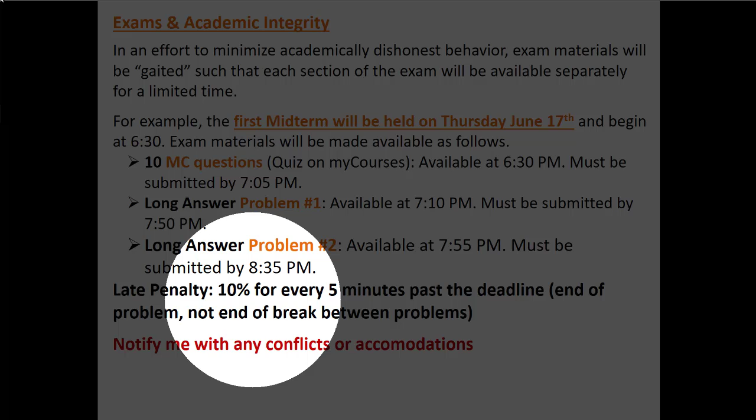Right? Now, if it's longer than 5 minutes late, then there'll be a 20% penalty, right? If it's longer than 10 minutes late, then, so it sort of goes up by 10. Do you need to print out the long answer? If we can't, what do we do? Yeah, so you'd hand it in like the homework, right? So you don't need to, you can just write on lined paper whatever your solution is, right? And then sort of scan it, like with CamScanner or however you do your homework, and then submit it.

Right, so there's this kind of escalating penalty, 10% for every 5 minutes that it's late. I think that if you look at the announcement that's posted on myCourses, it gives kind of an example of how that escalation works, just for clarity, but it didn't fit on this slide. So there's more details available in the announcement in the email that I sent you from the myCourses page.

The other thing that I would like to do, since we didn't formalize the time before this, if you have any conflicts with this time, or you have university approved accommodations that you would like to use for this exam and subsequent exams in this course, please let me know and we'll make sure that that gets applied. It does mean, not that you have to worry about this, but then you'd have sort of a different Dropbox to use, and a different quiz to go into, because things will open and close at different times. Does anyone have questions about the format of the exam?

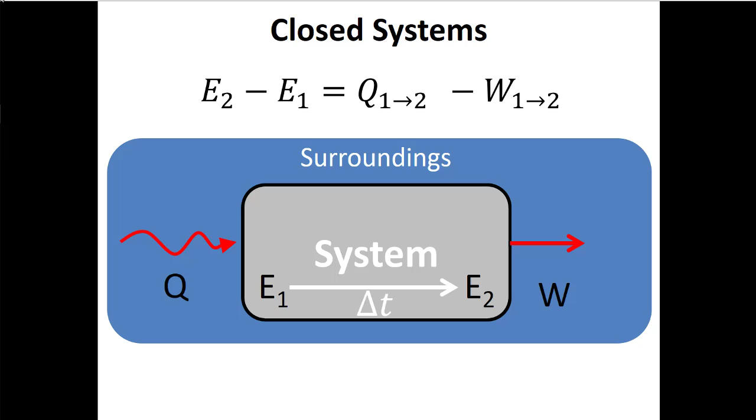Okay, so we've been talking about closed systems, right? So what we're going to talk about today, we're going to start to venture into the realm of open systems. Now, I always hesitate to say this because I'm not saying don't pay attention, but this material will not be on the first midterm, right? But we're going to move away from closed systems and into open systems today. But before we do that, I just want to go over a bit of a refresher, give you a bit of a flow chart, a reminder of how to do these closed system problems, right?

So we know that the first question that we want to ask when we're doing these first law problems is: is the system open or closed? And up until this point, and on the first exam, the answer to that question has always been, or will always be, that the system is closed. And because the system is closed, that means we use the closed version of the first law, right? That delta E is equal to Q minus W. If we make some assumptions, we can often turn that equation into delta U is equal to Q minus W.

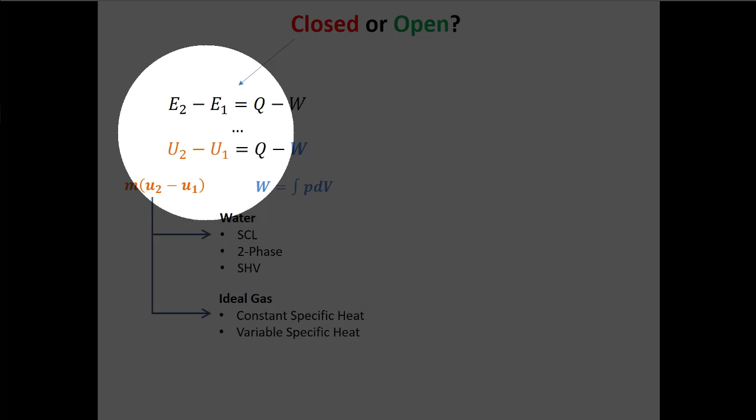And then we find the work done in a particular process by understanding what the pressure-volume relationship is. And if we can cast pressure as a function of volume, then we know work is the integral of P dV. And then on the other side of the equation, for delta U, we remember that that's mass times the change in the specific internal energy, right? So this is the end point of the process minus the initial point of the process. But then we've got to ask ourselves, what's the fluid? Right? And we have two different possible answers for that.

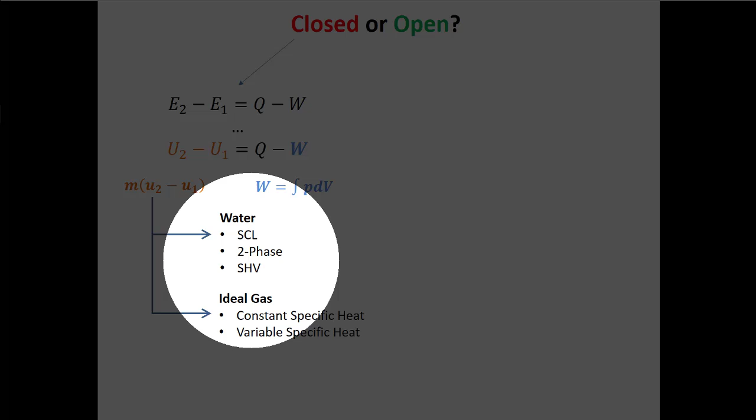The first, which we probably have more experience with, is that the system is water, or at least something that's going to go back and forth across the vapor dome. In the future, we'll deal with things like refrigerants that do this too. But for the first midterm, we can sort of say, okay, it's going to be water or air. But really what that means is something that's going to boil and condense, and an ideal gas, right? But if it's water or something like it, then we can either have liquid water, some two-phase mixture, a mixture of liquid and vapor that are both at the right conditions for phase change, but there's some mixture. It's not a complete liquid or a complete vapor. Or we can have superheated vapor.

So that's all steam that's past whatever boiling temperature exists for the pressure that we're at. So this is where we draw those PV and TV diagrams and we try to figure out where on that graph we are, right? What's the right part?

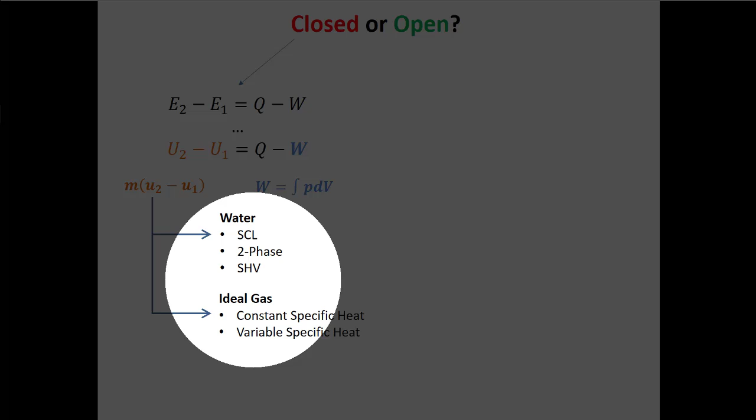But our other option here, instead of water, we can have ideal gases. Now, if it's an ideal gas, that's still not enough. The good thing is if we answer, oh, it's an ideal gas, that means we can use the ideal gas law, just like we did in the problem last class. But we still have to decide if we're going to model the change in the specific internal energy as constant or variable specific heat.

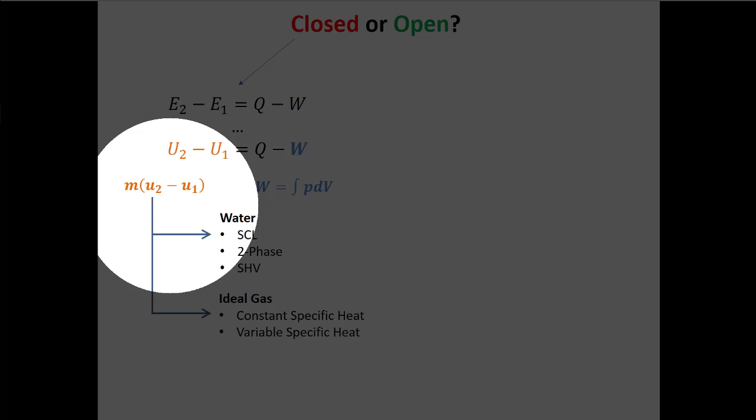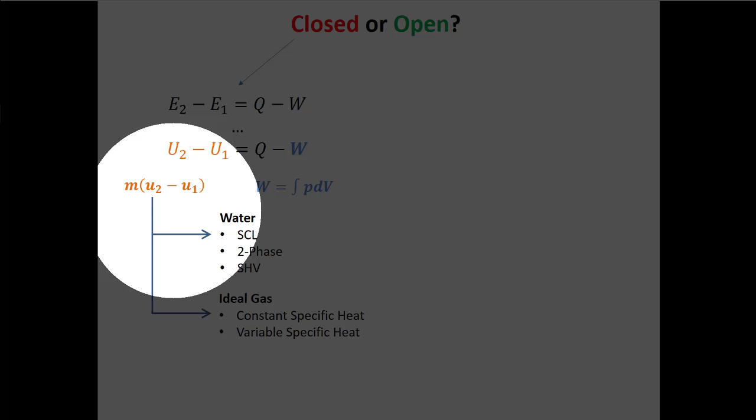If it's constant specific heat, we'll never find the individual specific internal energies. Instead, what we'll do is we'll pretend or model that delta U term as CV, the specific heat at constant volume, times the change in temperature. If it's variable specific heat and we're dealing with air, then we'd go to something like table A22 and we'd use a temperature and we'd interpolate to find a specific internal energy.

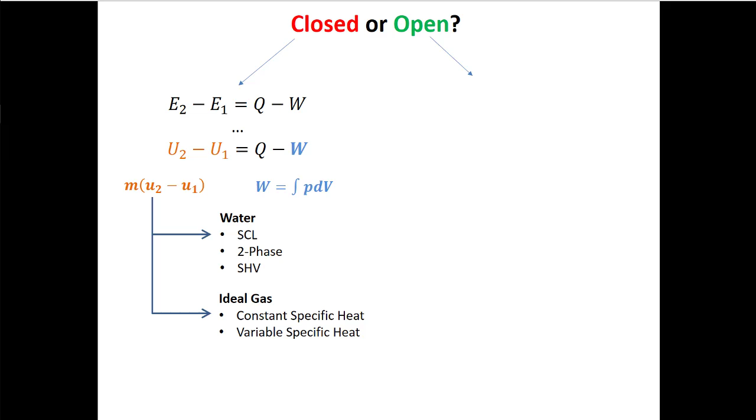So what we're going to start to talk about today is what happens when the answer to this first question isn't that the system is closed. What if we're dealing with a system where mass can freely enter and leave our system? So here we're going to have three more questions that we're going to ask. But the first one is going to be what happens to the mass. Eventually, we're going to ask what happens to the energy. Eventually, we're still going to deal with a different version of the first law.

But what we've really learned in this first module of the course is that mass itself has a means of storing energy. So if mass is coming in and out of our system, that means that energy must be coming in and out of our system with it. Because remember, thermodynamics is all about these energy transactions that are happening in the universe. So the first step towards understanding what happens to the energy is going to be what happens to the mass. Now, we didn't really talk about this for closed systems because in closed systems, what happens to the mass is nothing. It all just stays in the system.

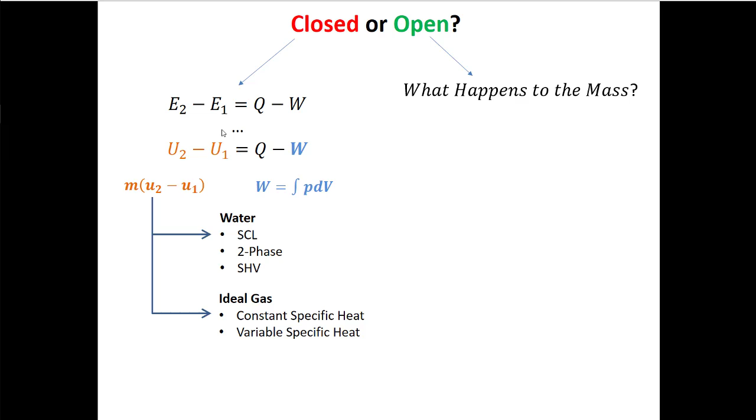So when we talk about open systems, or sometimes I'll use the word control volume, this is a system where we draw this imaginary boundary, which is called a control surface, that envelops whatever our system is. So this is a sketch of an internal combustion engine, and it's an open system because there's air intake that's coming into the system. There's exhaust of air. It's not the exact same air. There's some chemical process that's going on in here. And there's also a fuel line that comes and feeds the engine. There's air coming in, there's fuel coming in, and there's some kind of spent air fuel mixture that's going out of the exhaust. So this is an open system.

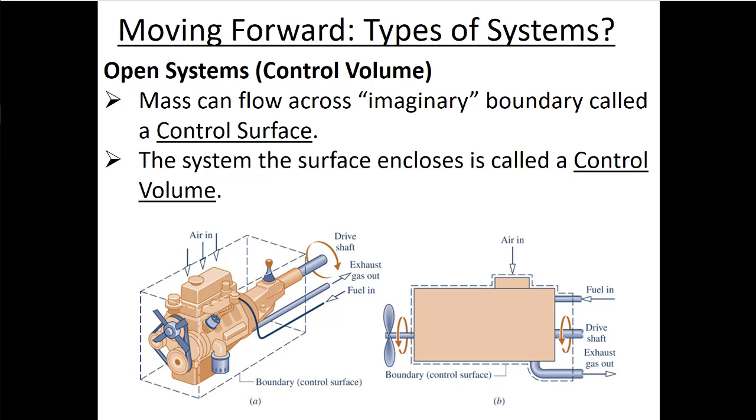So when we're dealing with open systems, there's a couple of things we have to do. So the first thing, this happens in closed systems too, we have to understand what are the boundaries of our control volume. So what's the boundaries of our system? What part of the universe are we interested in? Then we'll answer the question, what happens to the mass? And then once we know what happens to the mass, we can ask the question, what happens to the energy? So the main focus of what we're going to talk about today is what happens to the mass. But before we get there, I want to talk a little bit about how do we draw control volumes.

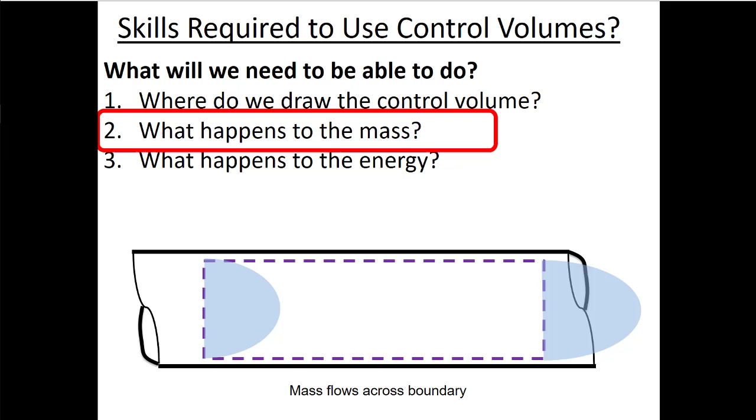So this is supposed to be a sketch of a pipe. And really what we're doing here when we draw this control volume, I try to draw the boundary up against some solid part, so up against the inside of the pipe wall here. And then the porous parts, the part where mass can flow through, I try to draw that so it's perpendicular to the flow. So the flow comes right across. We're not going to do any kind of vector calculations here, but when you start to deal in fluid mechanics and you try to find maybe forces that are acting on these boundaries of your control volume, it's a good habit to get into if you're drawing these lines perpendicular to the flow.

So what happens to the mass? In this class, there's a few core equations that we're interested in. We already talked about the first law of thermodynamics, this idea of conservation of energy. Another bedrock idea in thermodynamics is that mass is conserved. So the change in the amount of mass stored in a system over some time interval, we can figure that out if we just count all the mass that came in and all the mass that went out.

So again, there's this verbal definition, but I think the math here is more straightforward. Basically the mass at the end minus the mass at the beginning is equal to all the mass that came in and all the mass that came out. I got my teacup over here. If I take the lid off, it's empty right now. There's no mass in here. But if I put this out in the rain, like it was pouring rain yesterday here, there'd be some mass coming in, which would mean that my mass at the end would be more than my mass at the beginning.

Now, this is pretty straightforward. I could tell this to my 3-year-old and she would kind of get it. But the problems do get a little bit more complicated, so we have this mathematics to take care of it. The change in the mass stored in the system, that's what's on the left-hand side of the equation, is equal to... This is like the bouncer at the bar counting how many people come in and how many people go out, because there's some regulation about how many people can be in the bar. So we're gonna count all the mass that comes into the system, and then all the mass that goes out. And the difference must be stored in the cup.

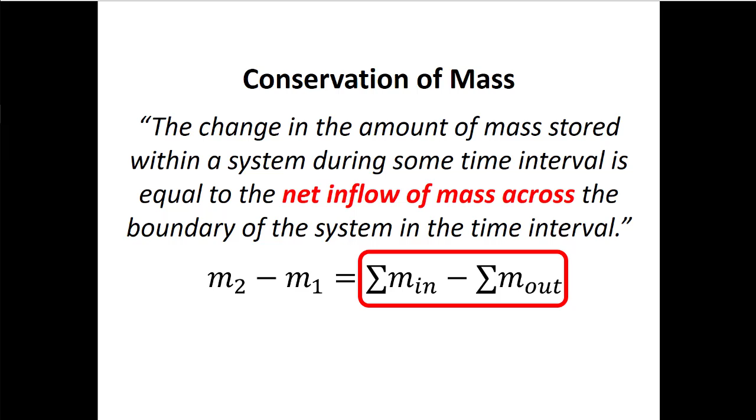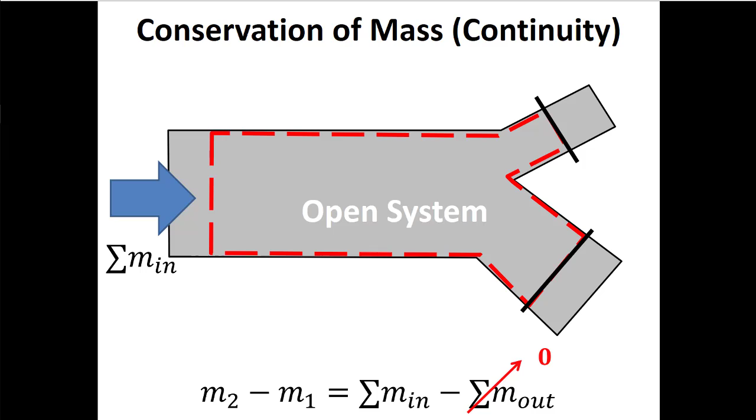And then I could take this system, let's say this was a pipe system, and it's filled with nothing. It's not filled with nothing, it's filled with air. So I block the 2 ends, so no mass can get out. If no mass can get out, and I want to find out how much mass exists at the end, I can just add up all the mass that came in. That means this would be positive on the right-hand side. That must mean that the mass at the end of the process is more than the mass at the beginning of the process. Hopefully that's pretty straightforward. Now this would be the equivalent of, I guess, your toilet when you flush it.

The first thing that happens before the valve opens back up is that there's no inlet fluid into the reservoir of the toilet, but the water rushes out of the reservoir, right? So in that case, there's no mass in, that's 0, but there is mass out, and that must mean that this right-hand side is a negative number. So that must mean the left-hand side is a negative number, and the mass stored in the system at the end of the process is smaller than the mass stored in the system at the beginning of the process, right?

So we can find the mass at the end of the process if we know the inflows and the outflows, right? So this is conservation of mass. Sometimes, because we do this to ourselves, there's shorthand and you got to bust out your engineering decoder ring, right? So sometimes instead of saying the words conservation of mass, someone will say continuity, the continuity equation. When they say that, they're talking about conservation of mass, right?

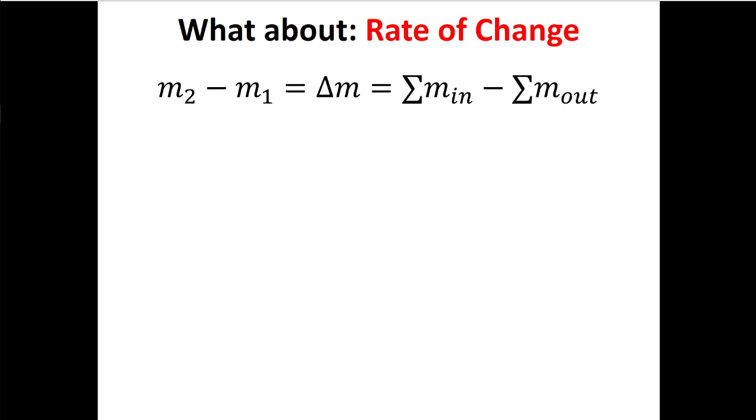Now, there could be alarm bells going off in your head. That means there's some calculus coming. And that's more or less true, but just to formulate the equations. We tend not to do too much calculus in this class, although that'll come in heat transfer and fluid mechanics. But how do we construct a rate equation from this elapsed time equation? Maybe you remember this from math class.

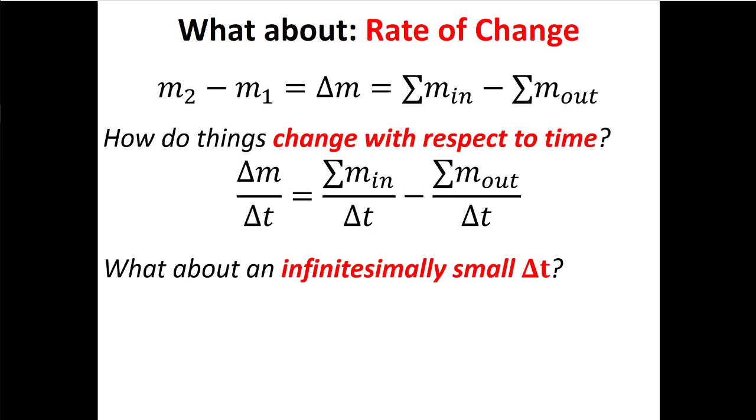We're going to take all of these terms and divide them by some change in time. So there's going to be the change in the mass stored in the system divided by some time interval, the amount of mass coming into the system divided by a time interval, and the amount of mass going out of the system divided by a time interval. And to construct a rate equation, we say, what if that delta t, that time interval, is super, super short? It's an infinitesimally small change in time. Then these terms become rate terms.

Now, we're going to use a specific kind of notation because there's basically two different kinds of rate terms that we can talk about. The first ones we're going to write down like you'd see in calculus, as d something by d something else. In this case, the mass stored in the system by time. So dm/dt is going to be on the left-hand side of the equation. When it's d something by dt, it represents something that's stored or depleted in our system. We can write that for the energy in our system, or for the mass in our system.

But then we have these other terms. These terms are not about what's going on inside the system. These terms are about what's going on at the boundary of the system. They're not talking about what's being stored or depleted in the system. Instead, they're talking about the rate: how fast is mass coming in at the inlet, and how fast is mass going out at the outlet?

So even though all these terms have the same units, kilograms per second, for example, some unit of mass divided by some unit of time, they mean different things. So we denote them differently. Things that are happening at the boundary are typically given a dot. This is another way in calculus that you sometimes represent d something by dt. But when we put a dot over something, what we mean is it's something that's not stored in our system.

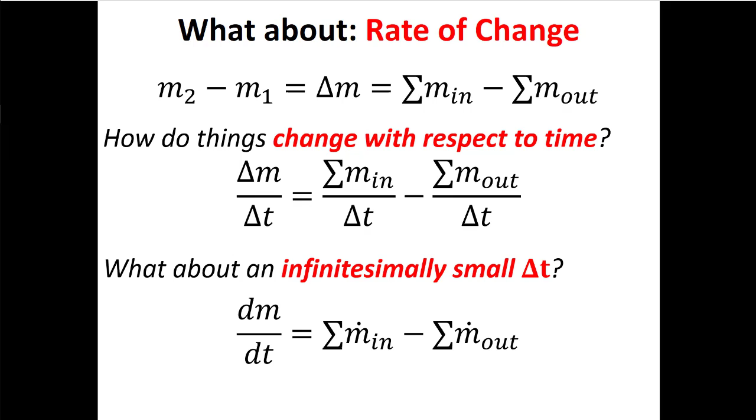Or something that's happening at the boundary, right? So we got dm by dt is equal to the mass flow rate in minus the mass flow rate out. And the reason that we do this, well, I guess we'll see. I don't want to get ahead of myself here. So here, if we write out the words for this expression, this is no longer the change in the mass. This is how fast is the rate of mass changing.

So if I was leaving my cup out in the rain and I knew how fast the mass was changing and I knew the density of the water, I could tell you something about, this isn't about what's the water level at one time and what's the water level at another time. This is about how fast is that water level moving up, or how fast is that water level moving down. This is how fast am I storing the mass, or how fast am I depleting the mass?

If you thought about this in terms of like your cell phone, did you use the normal charger or did you use the fast charger that maybe came with your phone? So how fast is the system charging? How fast are we storing or depleting mass in our system? I don't know if that analogy worked.

So then this next term, this is going to be the sum of all the mass flow rates into the system. So, in that branching path that I showed before, which I'll show you again, there's only one inlet. So I only have to worry about one mass flow rate in. But there were two mass flow rates out, so we got to add them together to get the total mass flow rate out.

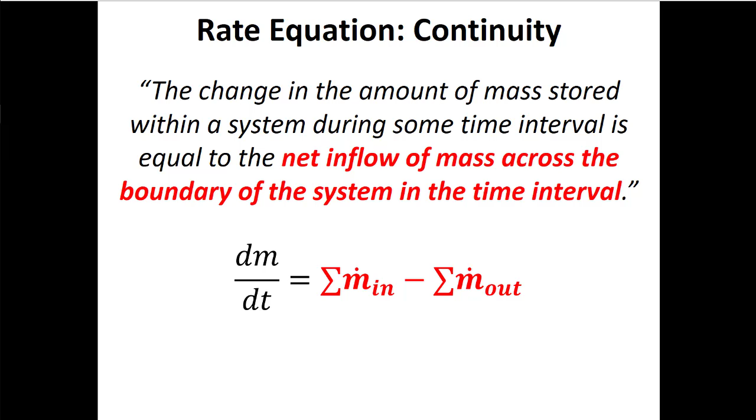But if we look at this pictorially, now we don't have to look at it at two different moments in time. Instead, we're taking a snapshot: what's happening at a particular instant. Now we're saying, how fast am I storing or depleting mass in my system? So that's my dm by dt term. Is this positive? Is it negative? Is it zero? I don't know.

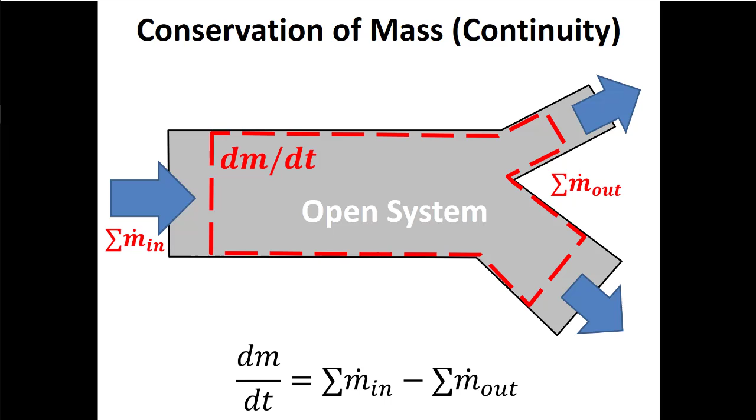Could be anything. And then I've got, okay, how fast is mass coming in here at the inlet, and how fast is mass going out at these two outlets? And if I add all of those things together, I can figure out, am I storing mass or am I depleting mass? So the rate at which the mass is changing is determined by the sum of all the mass flow rates in minus the sum of all the mass flow rates out.

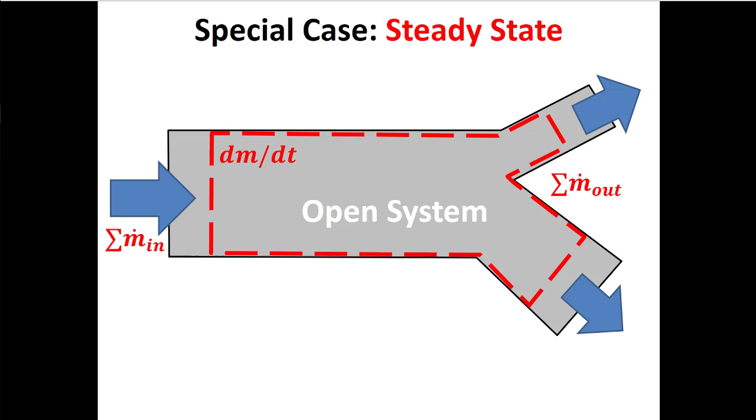Now again, we can get to this kind of special case, where the water level in my cup is not changing even though there's mass coming in and there's mass going out. That's steady state. At steady state, nothing is changing. So the reason that we have different notation for these different terms: the d something by dt terms are going to be talking about how much something is being stored or depleted in my system.

The reason we do that is because then when we get to this condition of steady state, it means how fast is the mass in my system changing? Oh, it's not changing at all because we're at steady state. So then all these d something by dt terms go to zero at steady state. So at steady state, the rate of change of mass in the system has to be zero.

But I can still have mass coming in and mass going out at whatever rates that's happening at. It's just those rates have to be balanced so that the sum of mass flow rates in has to equal the sum of the mass flow rates out.

So that's why we keep the notation different, because the terms that are dm by dt, or later we'll see like dE by dt, those terms go to zero when we are at steady state. And that makes our life better because there's no calculus. So this is the equivalent of, you've already turned on your car in the winter and it's already warmed up. People say they get their car to warm up first, right? So they're not changing.

They say you grow into your parents, right? So maybe I'm doing this too. But my dad's the guy on the 2-lane highway that pulls up and he's passing the truck on cruise control, like 1 or 2 miles per hour faster than the truck. So his car is at steady state and that truck is also at steady state, and it's just moving past it.

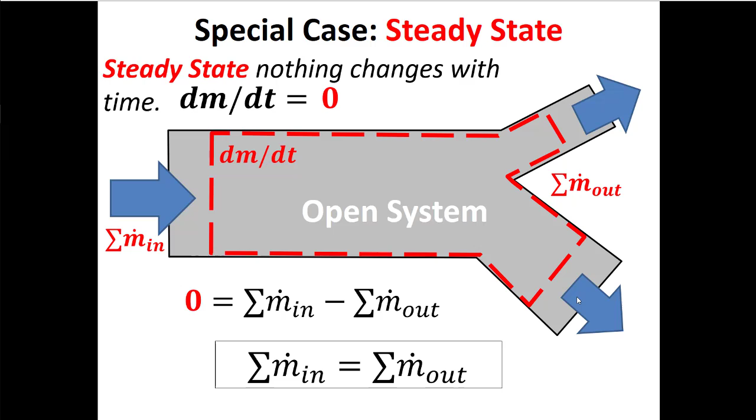But me, at least 20-year-old me, when I was passing that truck, I was not at steady state. My foot was much closer to the floor, and I was getting by that truck as fast as I could. So that was not steady state, because I'm accelerating. So something is changing with time.

So here's our equation: dm by dt is equal to the sum of the mass flow rates in minus the sum of the mass flow rates out. So we got one equation and we've got 3 unknowns. A lot of times in this class in particular, maybe when you go to Thermo 2 this won't be the case, but in a lot of problems in this class, we'll be worried about steady state. Steady state's really important in a lot of problems.

So like nuclear power plants, the idea is you kind of turn them on and you just leave them, so a lot of times they're running at steady state. When you're at cruising altitude in a plane, you're probably more or less at steady state versus when you're taking off. But most of the journey, you're more or less at steady state. So if we're at steady state, the beauty is that this term goes to zero. We don't have to use something like separation of variables or anything.

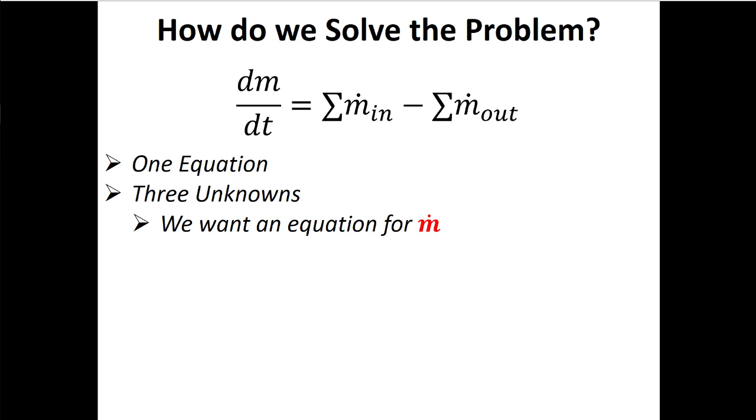But then how do we deal with these mass flow rate terms? How do I put those in? Because some problems will tell me there's some mass flow rate, but some problems won't. Maybe you'll have to figure it out. Maybe you'll have to fix states, because we've been doing that a lot. That's maybe some foreshadowing.

So if we look at flow in a pipe, you won't learn this until you're in fluid mechanics, but the way that we model it is we think about the fluid as lots of little pieces. Even though it's some continuous medium, we think about it as having lots of different fluid elements. We almost digitize it. And the fluid elements that are closest to the wall, we say that they have this no slip condition.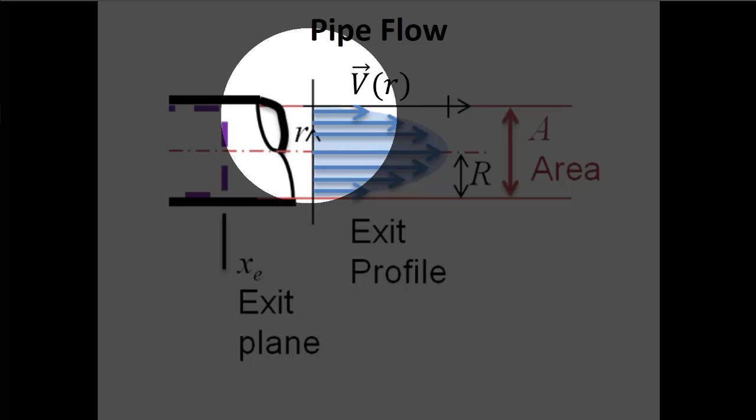The water in the middle of the tube is free to move throughout the whole thing. It's going pretty fast. Those water elements that are stuck against the side, they're just stuck there. They can't move. They're like Luke's aunt and uncle on Tatooine, they're never getting out. So they just stay there, but there's fluid in the middle that's moving through. So you have some kind of shape if you plotted the velocity as a function of the radius in the tube.

Now, we got a lot of different variables here. We can talk about the speed, that's just the scalar version of the velocity. We can have velocity because speeds have directions too. We can talk about this v with a bar over it, that's average speed. Sometimes I use volume, so this is why sometimes I cross my v's to denote volume, because in some problems you can have a volume, a velocity, you could even have a voltage if you were heating the fluid in this pipe.

So, sometimes we only have one letter, right? So for right now, we're going to talk about volumes with a cross through them. So that's going to be my volume. And then my specific volume, we know about this: this is volume divided by mass. Here, this liquid is going to have a density. That's 1 divided by the specific volume.

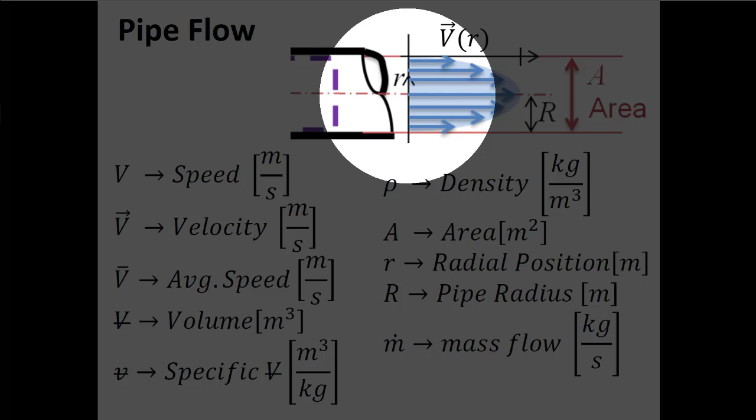There's a cross-sectional area of this pipe. So if I took a bandsaw and just cut through it, it looks like a circle. There's our radial position, our coordinate system. Then there's also the radius of the pipe. So our coordinate system goes from 0 to big R. And what we would like to know is the mass flow rate through the pipe.

Because there's some velocity distribution in the pipe, what we could do is integrate along the pipe and find the mass flow rate. So the mass flow rate, if we wrote it out mathematically, we would have the integral from 0 to big R of density times velocity as a function of R times dA. So I guess this should go from 0 to A, right?

And there really are two integrals here. One you'd be integrating with the radius, and the other you'd be integrating along the azimuthal direction, in theta. Because theta just goes from 0 to 2 pi, this goes density times velocity, which is a function of the radius, times 2 pi r times dr. Now, I don't expect you to have to derive this equation, but I want to show you that I'm not just making this up.

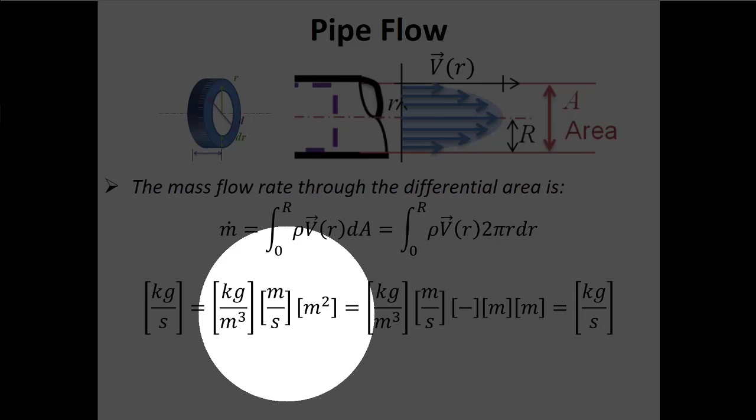We start with kilograms per second. This is always a good thing if you're not sure about your equations. We think it's a mass flow rate, so that's kilograms per second. We have density, which is kilograms per meter cubed, multiplied by velocity, which is meters per second, multiplied by area. So meters per second times area is like meters cubed per second. Sometimes we might call that a volumetric flow rate: what's the volume coming into the system and going out of the system? Now my equation looks a little different, but I still get the same units. So that's good. I can't convince myself that my equation is wrong anyway.

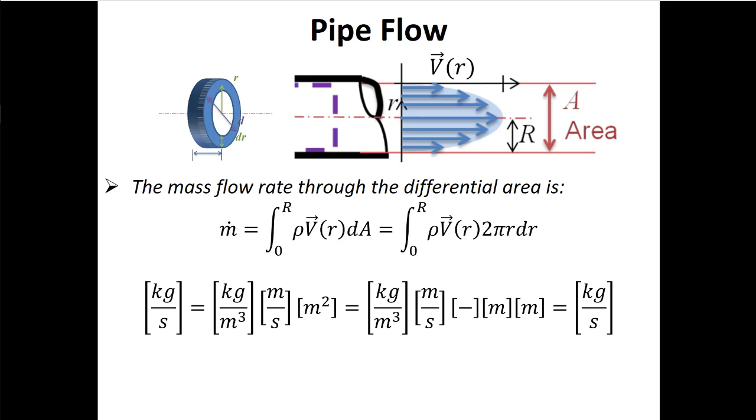So let's make an assumption. Let's make our lives a little bit easier. The best calculus is when the answer is 0, but the second best calculus is when something is constant. So let's pretend, even though we know that velocity could be a function of the radius, what if it's not? If it's not, then I can just take the density times not this velocity distribution, but the average velocity.

So I could find the average velocity: let's say I turn my hose on and I have a pail and I know the volume of the pail. I could figure out how long it takes to fill up that pail, and then I could find the average velocity of the fluid coming out of the pipe. But without some way to measure the velocity, taking measurements at different parts along the pipe, I can't really know the velocity distribution, at least experimentally.

So here I could say this, and then I could integrate from 0 to R of r dr, and then I get this: the mass flow rate is equal to the density times the average velocity times the area. And in this case, because the cross-section is a circle, the cross-sectional area of my pipe is pi times big R, the actual inner radius of the pipe, squared.

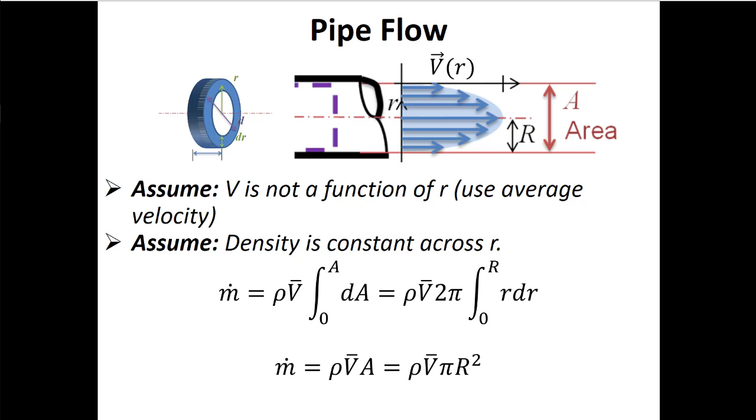Now, because this is thermodynamics class, we don't talk about densities, we talk about specific volumes. So the mass flow rate equation that we'll typically use is: the mass flow rate is equal to the average velocity times the area divided by the specific volume. So that equation is going to be pretty important for us. But you can see here that sometimes we're going to have to fix the states.

At all the inlets and all the outlets, we're going to have to know what the specific volume is, right? So we're going to have to fix the states. Because the density will not be constant, because a lot of times we're talking about steam engines. So a lot of times we'll have water coming in and steam going out.

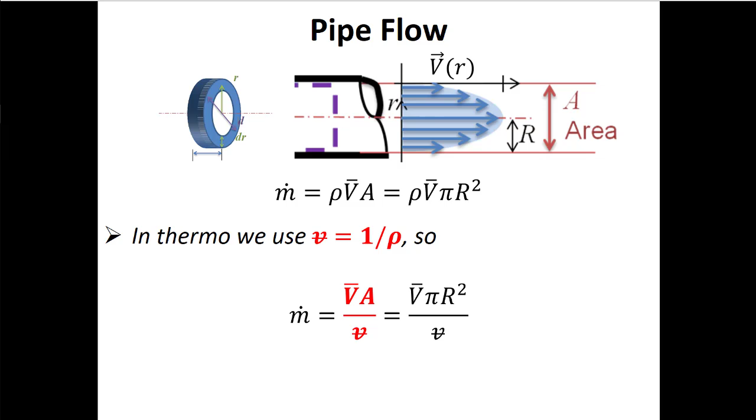If it was just water coming in and water going out, well, the density is pretty constant, even if the temperature changes. If it's liquid, it doesn't really change the density that much. But if I have water coming in and steam going out, the density changes by about a factor of 1,000. So that's pretty important. You'll definitely get the wrong answer if you don't account for the fact that the specific volumes are going to be changing in these problems.

But to get to this equation, we had to write down this assumption that the velocity in the pipe was approximately constant. Now, is that a reasonable thing or not? Maybe you've heard of something called turbulence. Turbulence is this sort of chaotic mixing of flow, and it happens as flow gets faster.

You ever played Crack the Whip as a kid? I don't know if it's a Canadian thing or not. Skating on ice, and you're holding hands with the people, and there's somebody standing kind of at the center and you're running around. And what happens is the stress changes as you get further away in the radius. And eventually the whip cracks, somebody's grip fails, and all the kids fall down. This is what we did before the internet.

But here, the same sort of thing happens in this flow. If you go to the tap in your kitchen and you turn the flow on just a little bit, you'll see that the flow is kind of slow, but it's beautifully clear. You can look through it. Maybe it's got some curvature, so it distorts the image, but it's nice and clear.

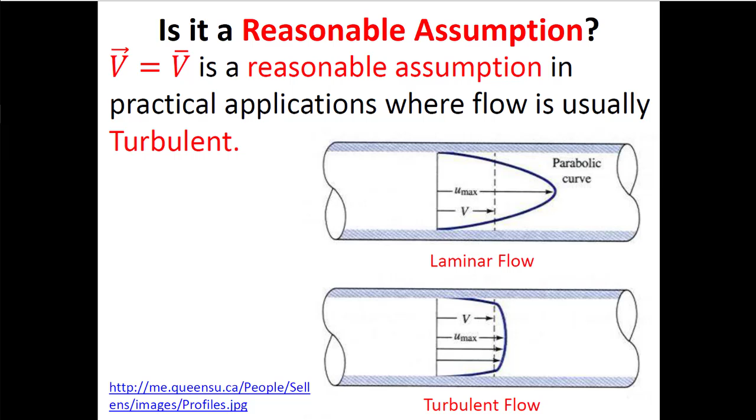So this assumption that the velocity profile is approximately constant is not terrible, especially for practical engineering applications. It's a pretty reasonable approximation, right? We like this in heat transfer too, because turbulence happens at faster velocities and you get better mixing in the flow. So you tend to get much better heat transfer in turbulent flows. So if that's something that you're interested in, it's also good, right? But you'll learn that in 2 years, right?

So we have this equation, conservation of mass, right? We can take these mass flow rate terms, the m dot terms, and change them into the average velocity times the area divided by the specific volume, right? So now my equations look like this, right?

So I get that the rate at which mass is being stored or depleted in my system is the sum at the inlets of the average velocities times the area of the inlets divided by the specific volume at each inlet, minus the sum of the velocities at all the outlets times the area at all the outlets divided by the specific volume at all the outlets. Right? So this is now what our conservation of mass equation looks like.

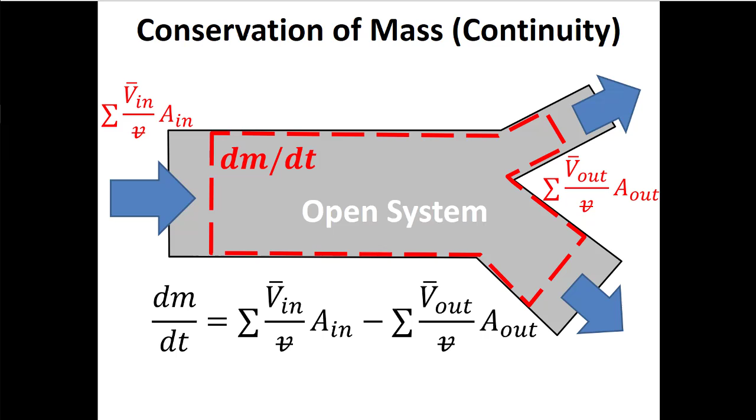So if we know the inlet velocity and we know the area, or sometimes a problem will tell you the volumetric flow rate, right? The volumetric flow rate is velocity times area. So we could also write this as capital V dot, the volumetric flow rate, divided by specific volume, right? That's another way to write that expression. We can still have steady state when we write the equation this way, and then we get that dm/dt would be equal to 0. So the sum of all the mass flow rates in is equal to the sum of all the mass flow rates out.

Right, so that's basically all we're talking about today, just this idea that we can store and deplete mass in a system, but for open systems, we're typically looking at the rate version of the equation. So we need to know the properties, like the velocity and the specific volume, and what's the area of the inlet. And when we have an outlet, we also need to know the velocity, the area, and the specific volume at the outlet, right?

And like we said, when we're talking about steam engines, you can have dramatically different specific volumes. So maybe at the inlet it's water and the specific volume is 1/1,000, right? But then when you get to steam, it's like 1.5, or 2, right? So just because you know the volumetric flow rates doesn't necessarily mean you know anything about the mass flow rates, right? So mass is conserved, but volume is not conserved. We'll do some examples next class.